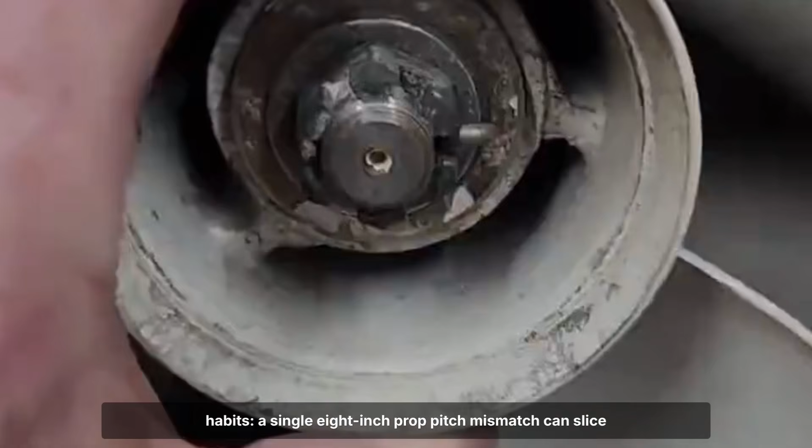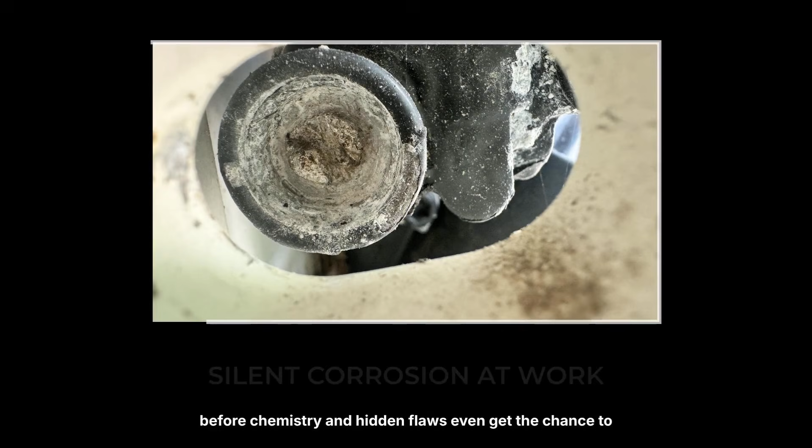What if every ounce of power and speed your outboard promised was leaking away, killed not by age, but by silent mistakes you make every time you launch? The shocking things that are killing your outboard's performance and speed aren't rare disasters. They're routine habits. A single 8-inch prop pitch mismatch can slice away power you'll never get back. And just a misplaced 6-gallon tank can quietly slow you by miles per hour, all before chemistry and hidden flaws even get the chance to strike.

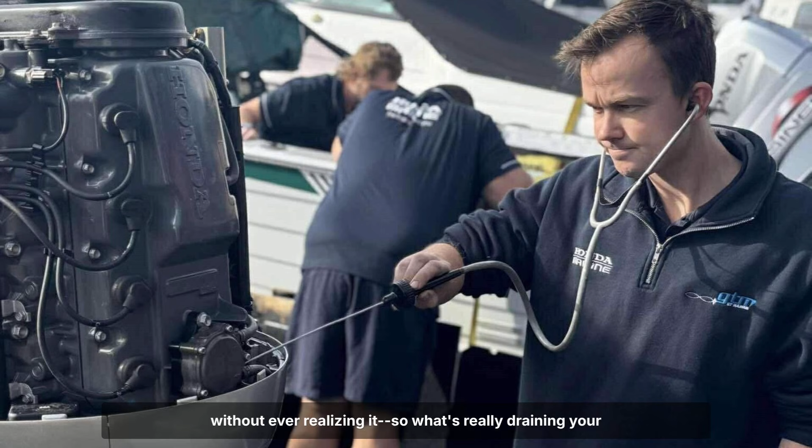Thousands of boaters lose years of performance this way without ever realizing it. So what's really draining your engine's potential? And how do you stop it before it's too late? Number 1 is trim and prop setup. If your trim angle is too low, you're forcing the bow down and dragging more hull through the water. That's pure wasted energy. Your engine works harder, but you lose speed and fuel efficiency.

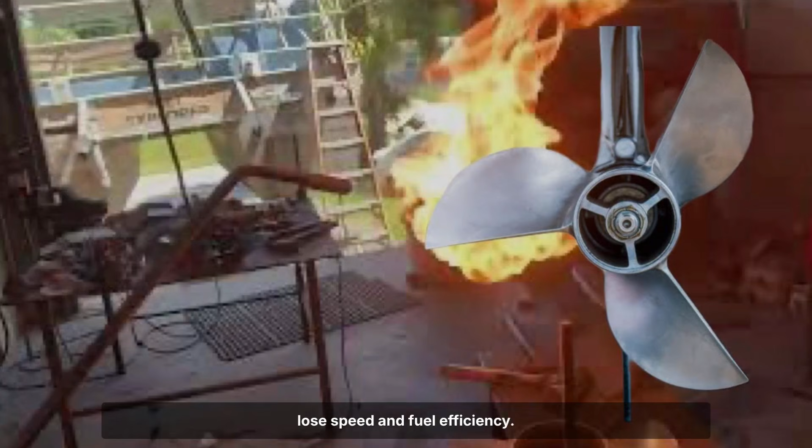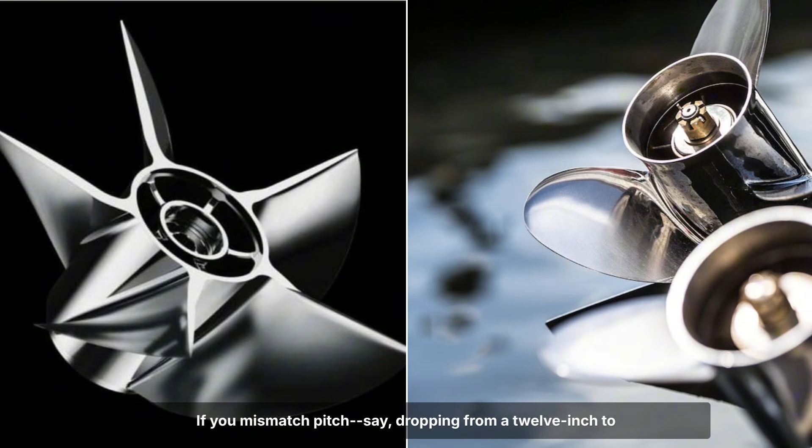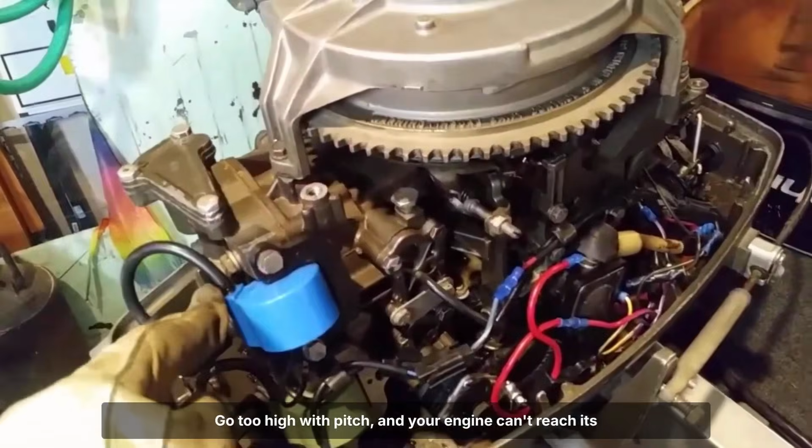Now, look at prop pitch. This prop has an 8-inch pitch, so in perfect conditions, every revolution moves you forward 8 inches. If you mismatch pitch, say dropping from a 12-inch to an 8-inch, you get more revs, but the boat moves less each turn, and your top speed drops. Go too high with pitch, and your engine can't reach its ideal RPM, choking off power and straining components.

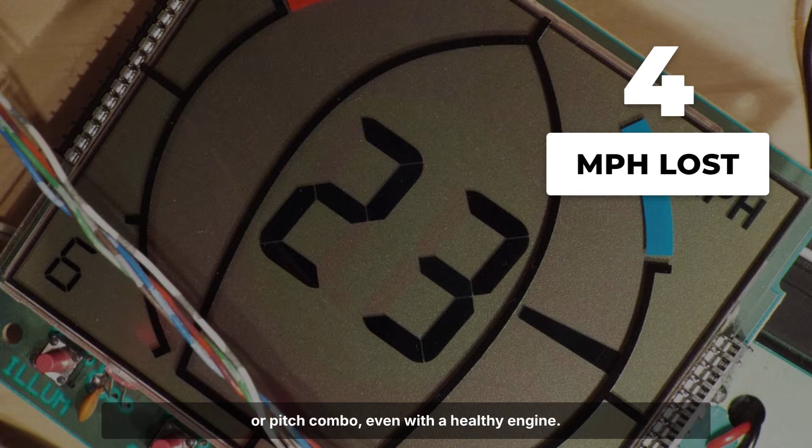Most boats lose 2 to 4 miles per hour from a bad trim or pitch combo, even with a healthy engine. The right geometry gives you lift, speed, and less drag. Get it wrong, and you're throwing away performance every time you throttle up.

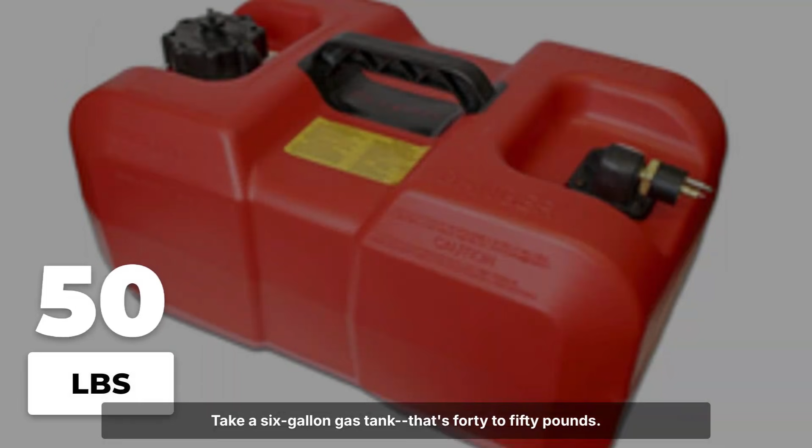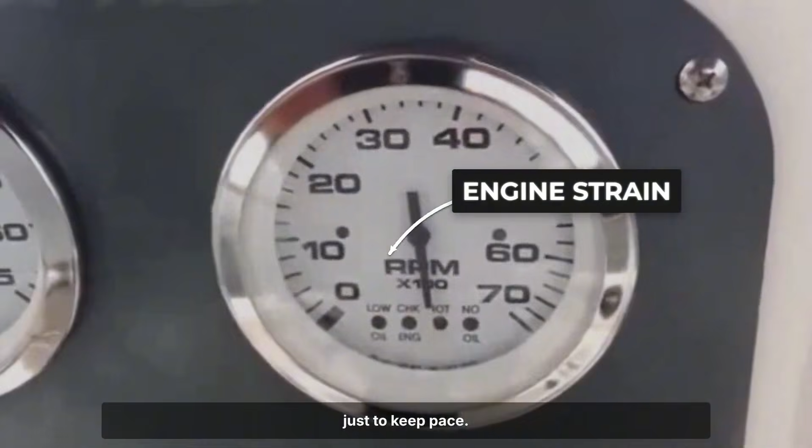Number 2 is weight and load mistakes. Every pound you add or put in the wrong spot quietly drags down your speed. Take a 6-gallon gas tank, that's 40 to 50 pounds. If you stash it up front, you're forcing the bow down, making the hull plow through more water. The boat rides lower, and your engine has to work overtime just to keep pace. Now stack up coolers, batteries, or extra gear, and you're adding real resistance.

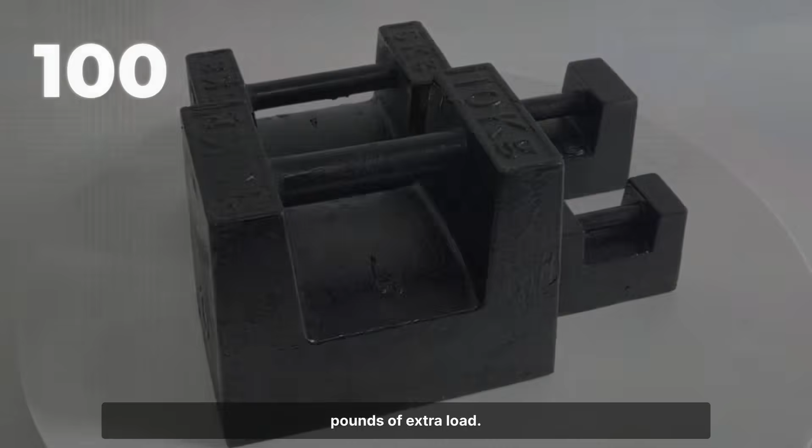It's not just about total weight, it's where you put it. Hull attitude changes with every shift, and that shows up on your GPS. Most setups lose a mile or 2 per hour for every 100 pounds of extra load. Overload it, and you're not just losing speed, you're burning more fuel and risking safety. Always pack smart, and don't let hidden weight rob your outboard's edge.

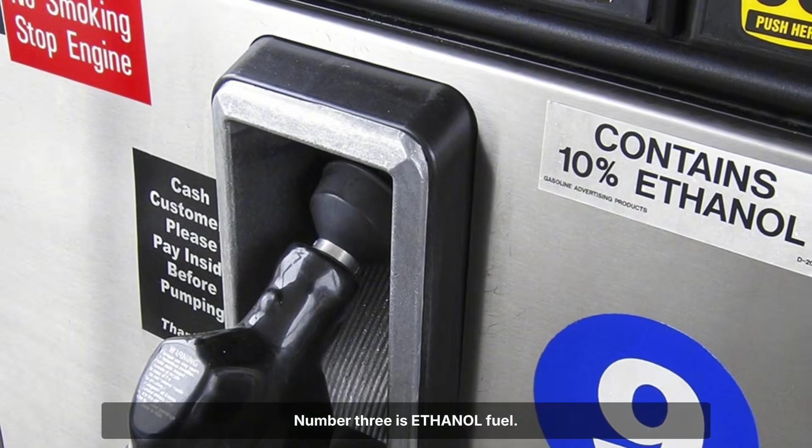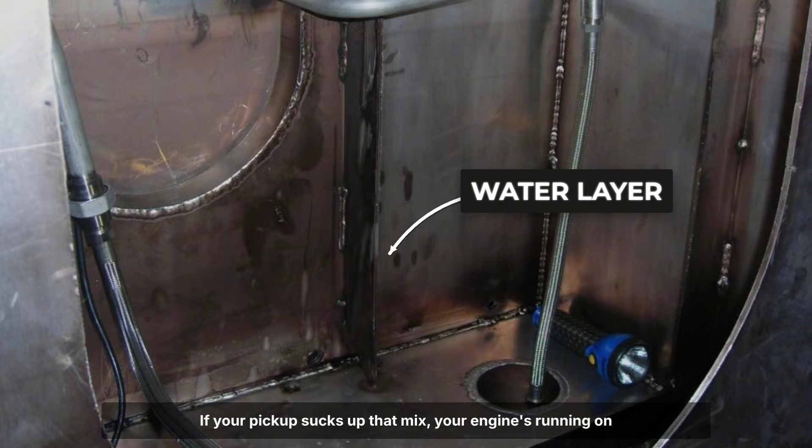Number 3 is ethanol fuel. Ethanol is like a magnet for water. Leave your boat sitting, and the alcohol in that gas starts pulling moisture right out of the air. Over time, you get phase separation. Water and alcohol drop to the bottom of your tank, and that layer is pure trouble. If your pickup sucks up that mix, your engine's running on something closer to swamp water than gasoline. Even a few ounces can kill power instantly.

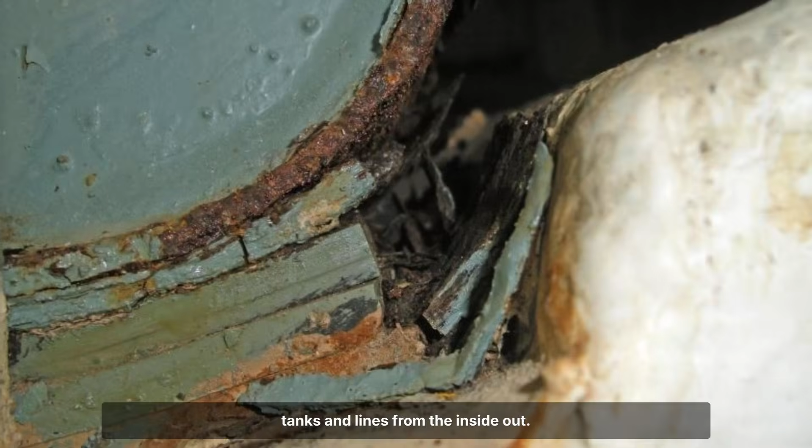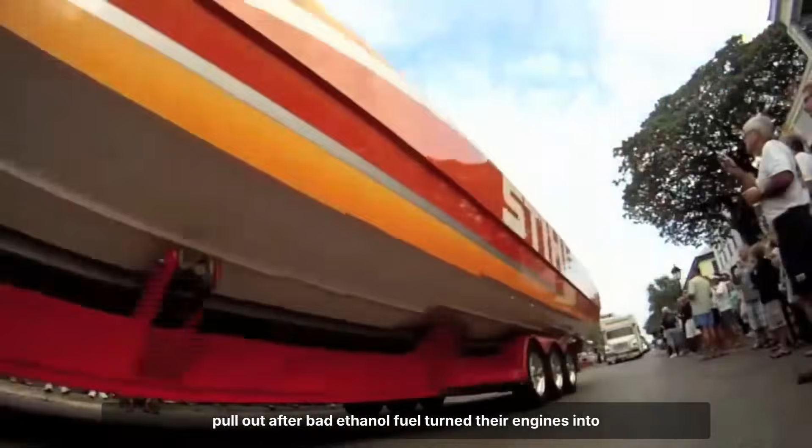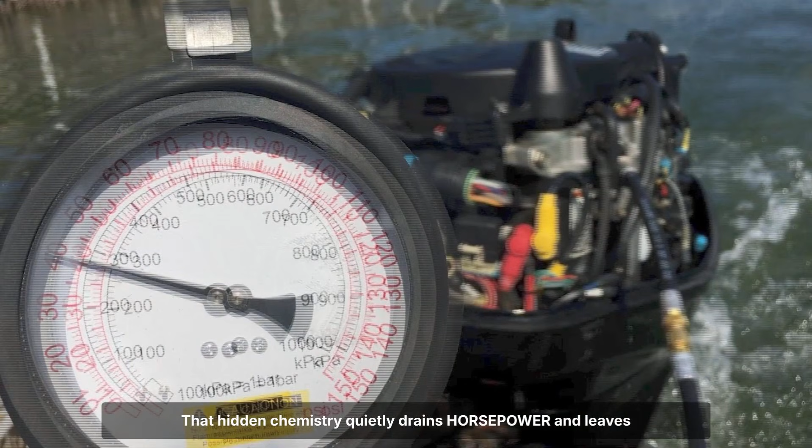It's not just water either. Ethanol fuels feed bacteria that turn into acid, corroding tanks and lines from the inside out. You can see the impact in real-world disasters. At the Sarasota offshore race, several teams lost speed and had to pull out after bad ethanol fuel turned their engines into anchors. When you run ethanol-blended gas, you're gambling with every tank. That hidden chemistry quietly drains horsepower and leaves you stranded when you least expect it.

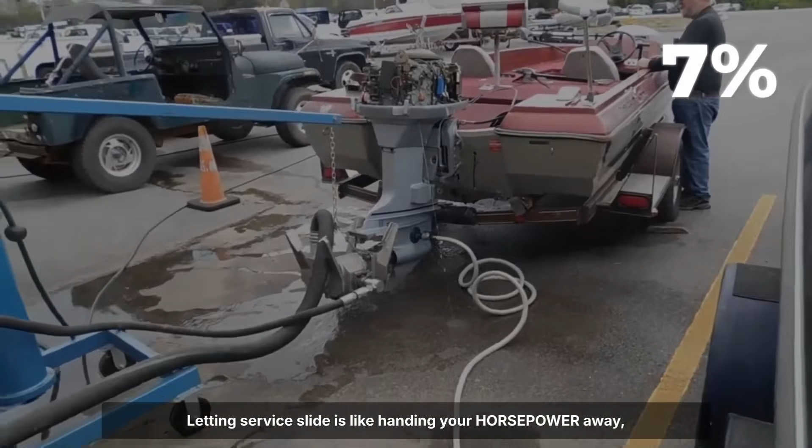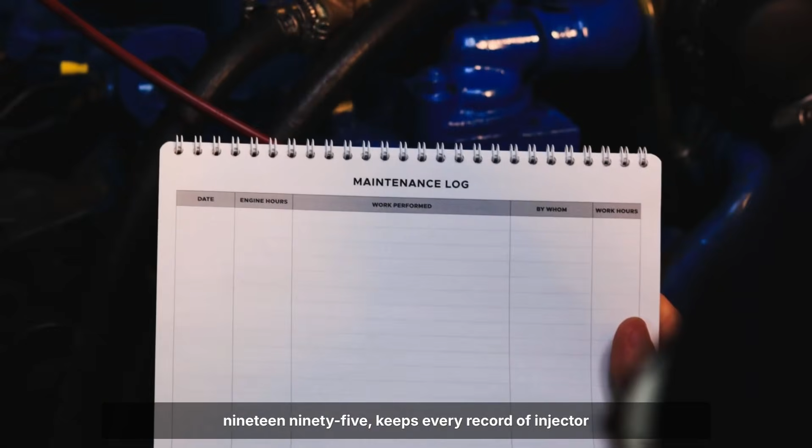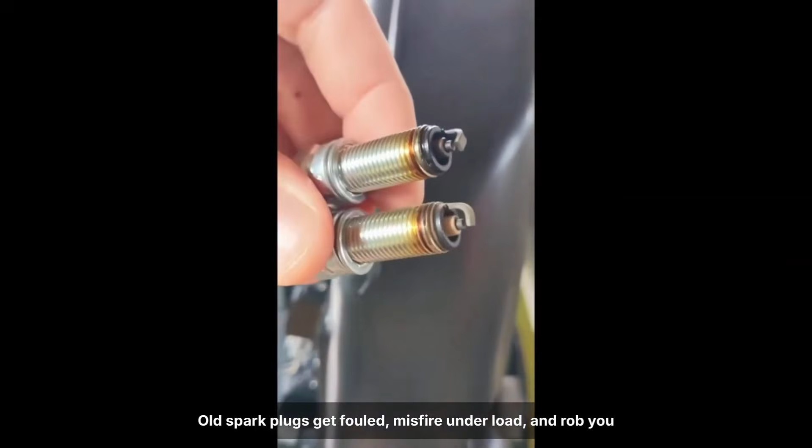Number 4 is skipped maintenance. Letting service slide is like handing your horsepower away, one piece at a time. Red Dawson, a marine mechanic with a logbook going back to 1995, keeps every record of injector cleanings and plug changes. He's seen engines lose 7% of their rated power. No drama, just slow decline. Dirty injectors start to drip instead of misting. And that means incomplete combustion with every cycle. Old spark plugs get fouled, misfire under load, and rob you of acceleration.

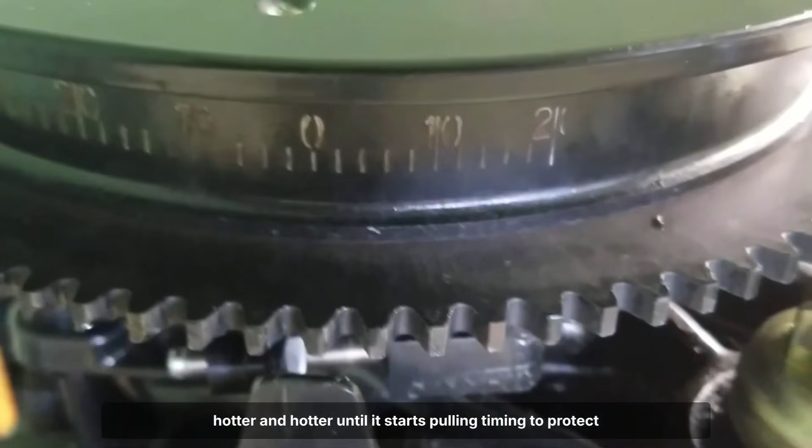Worn impellers don't move enough water, so the engine runs hotter and hotter until it starts pulling timing to protect itself. Red's records show that an outboard missing 2 years of routine service can drop a full 1,000 RPM at wide open throttle. Every missed oil change, every skipped filter, it all adds up. The decay is silent, but it's preventable, if you stick to the schedule.

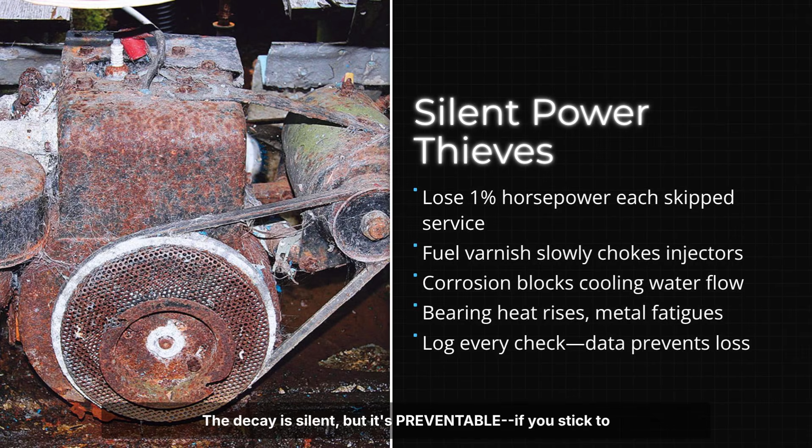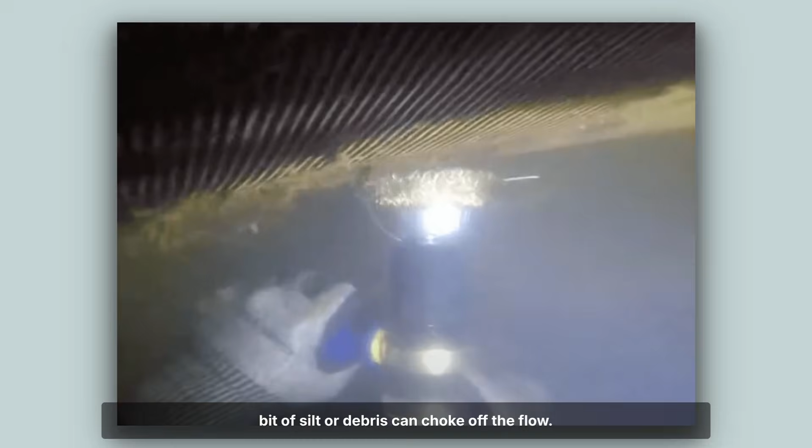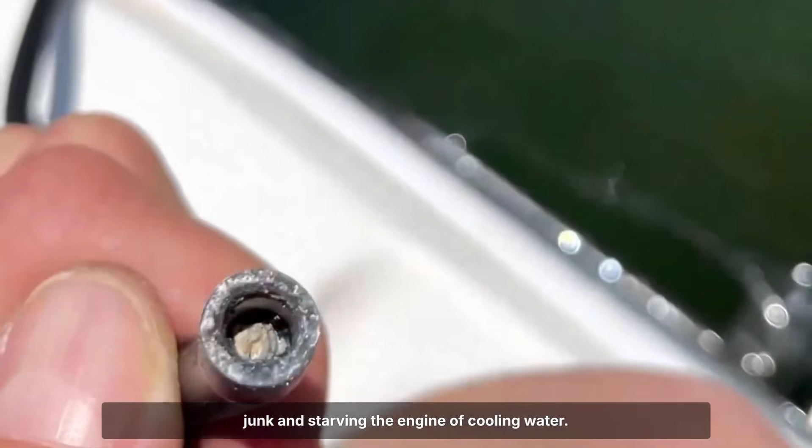Number 5 is coolant system blockages. Outboards rely on a steady stream of water, but even a small bit of silt or debris can choke off the flow. Yamaha's 2011 bulletin called out F115 and F150 models for overheating at speed. Turns out, inlet screens with holes just 1 millimeter wide were trapping junk and starving the engine of cooling water. Mercury had to recall lower units for the same reason, doubling mesh size to stop clog complaints. Drop your flow rate by 30% and head temperatures can spike 15 degrees or more. That's not just hot. It's enough to trip alarms and force your engine into limp mode.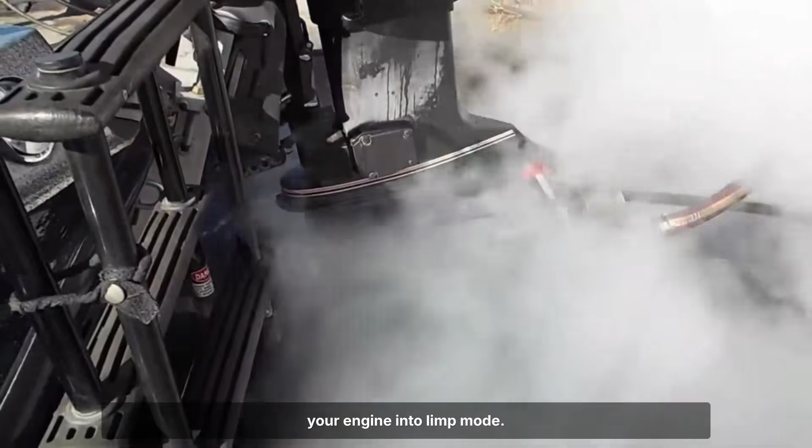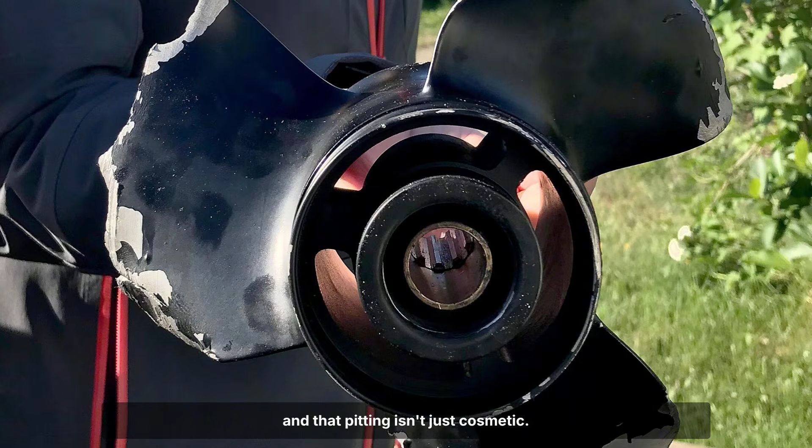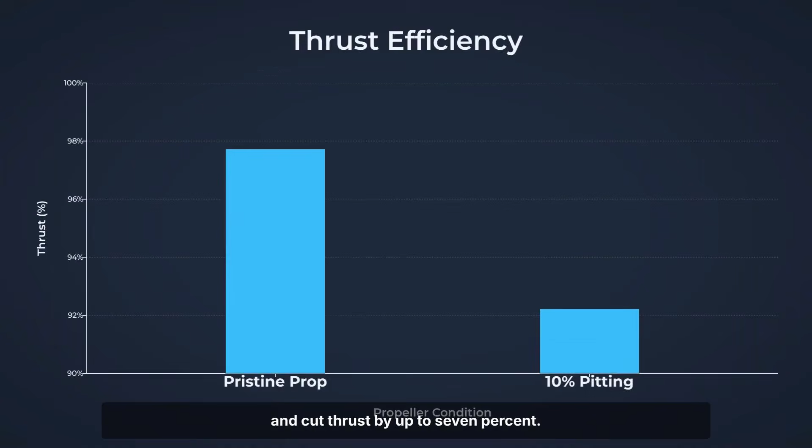Number 6 is propeller cavitation. When bubbles collapse against the blade, they pit the metal. And that pitting isn't just cosmetic. Lab tests show that moderate pitting, covering just 10% of the blade, can drop your top speed by 2 knots and cut thrust by up to 7%. Severe erosion means higher fuel burn, more vibration, and a prop that's working against you every mile. These aren't just owner mistakes. These are design flaws and material choices that the manufacturers themselves have had to fix, one bulletin at a time.

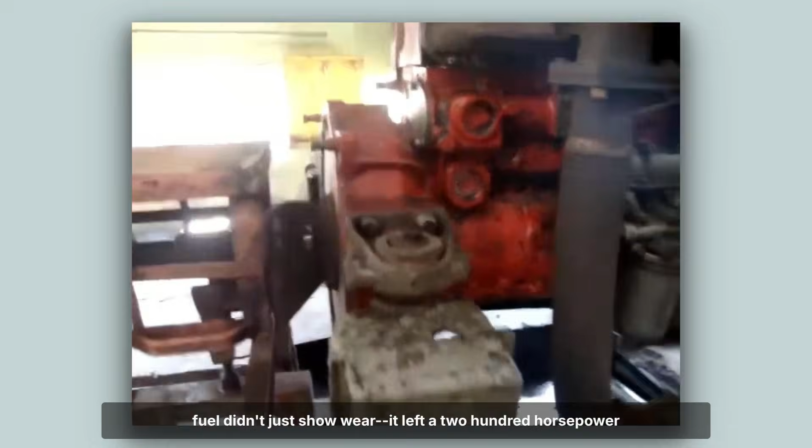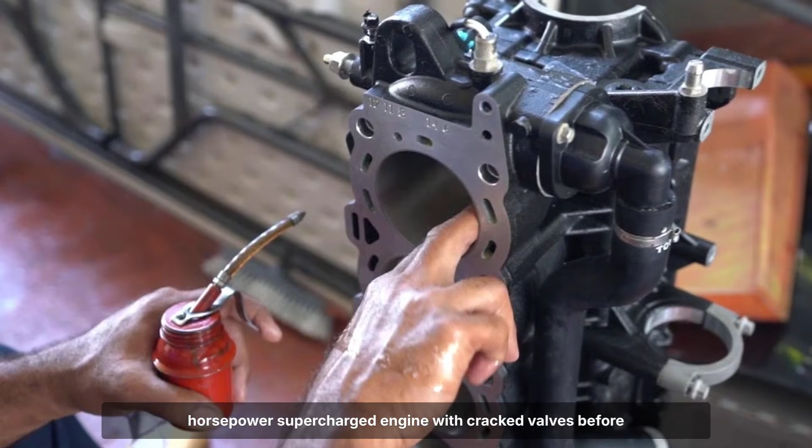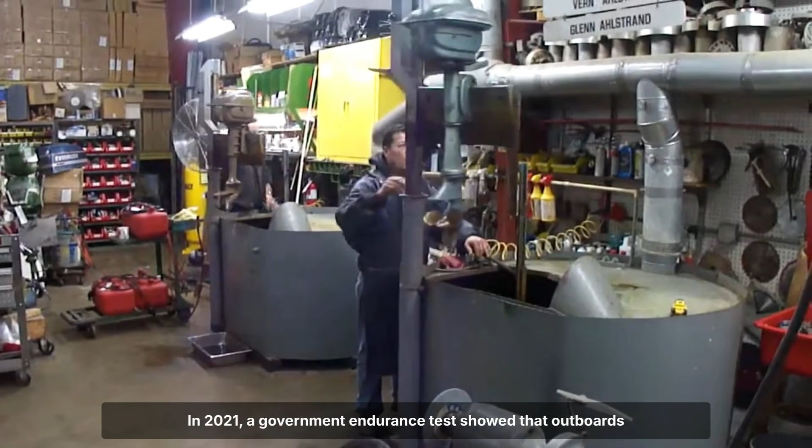A 300-hour government endurance test on E15 fuel didn't just show wear. It left a 200-horsepower outboard with a shattered rod bearing and a 300-horsepower supercharged engine with cracked valves before the trial could finish. Exhaust temperatures climbed 20 degrees Celsius above spec, stressing every part. Warranty disputes erupted as the renewable fuel standard kept risky blends at the pump, raising the odds of misfueling and silent engine failure for anyone on the water. In 2021, a government endurance test showed that outboards running E15 fuel suffered rod bearing failure and a 20 degrees Celsius spike in exhaust temperature within just 300 hours.

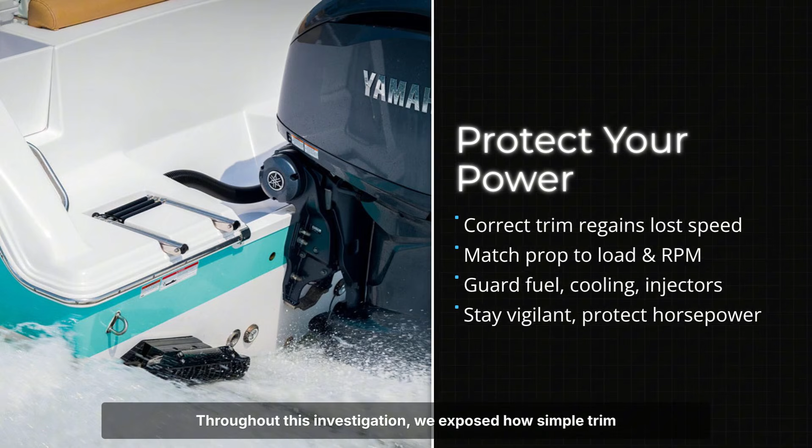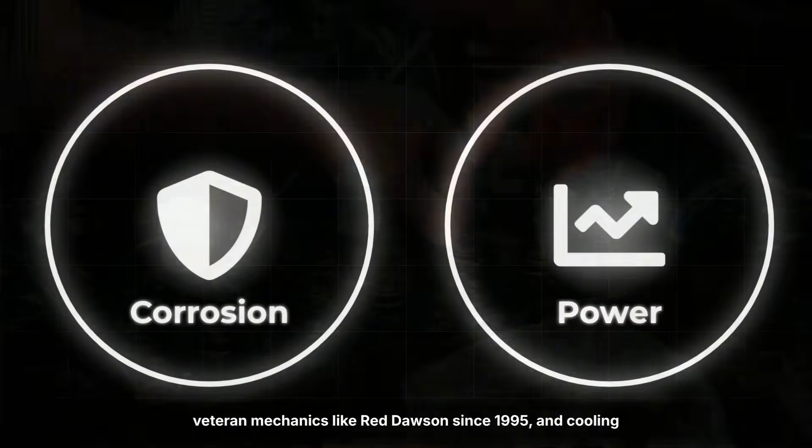Throughout this investigation, we exposed how simple trim and propeller mismatches can cost up to several miles per hour, while a misplaced 50-pound fuel tank or a 100-pound overload leads to measurable speed loss. Yet the most damaging threats are often invisible. Phase-separated ethanol fuel, injector corrosion logged by veteran mechanics like Red Dawson since 1995, and cooling blockages that triggered official recall bulletins from major manufacturers.

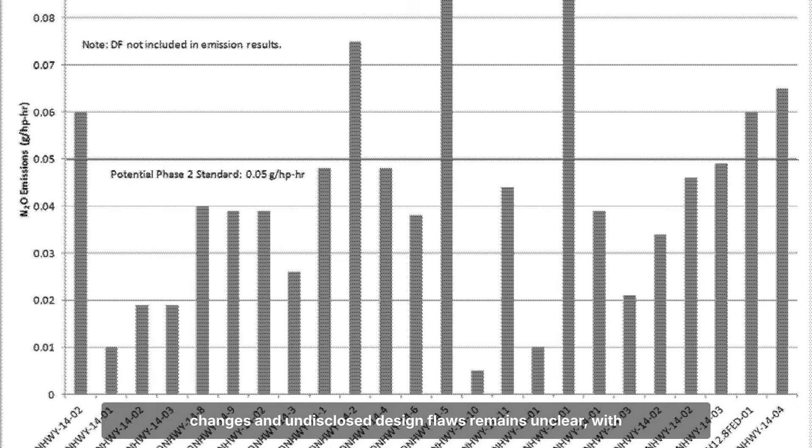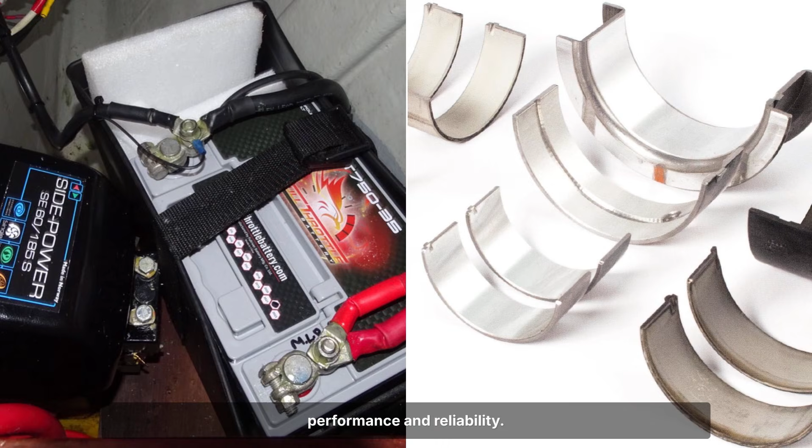Despite the evidence, the full impact of ongoing fuel policy changes and undisclosed design flaws remains unclear, with many warranty risks still unaddressed by regulators. What is certain, every outboard owner faces a combination of factors, some avoidable, some systemic, that erode performance and reliability. The documents and data are clear. Only informed vigilance can preserve the power and speed these engines were built to deliver.